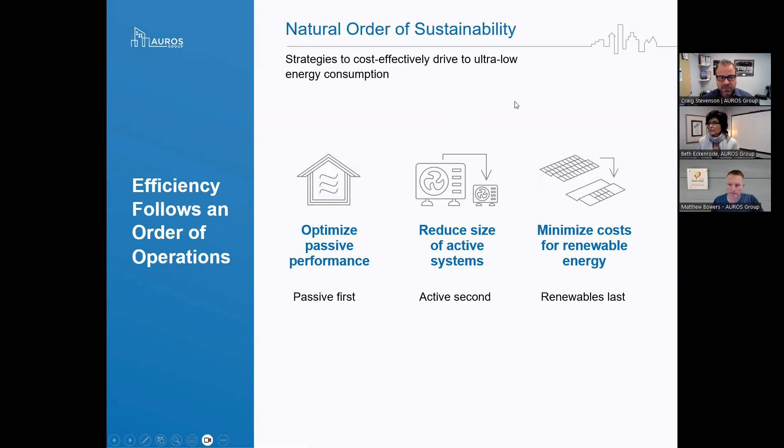The Passive House Accelerator is an organization of practitioners that have been doing this for a long time. And they come at this in a slightly different way, but really using the same philosophies, the same logic, right? They want to also use passive house strategies to first bring out as much efficiency from these buildings as we can. And then they want to electrify everything and then use clean energy to offset that. And that's how they get to zero carbon. It's really the same methodology and the same thought.

We want to electrify everything because we cannot offset fossil fuels like natural gas. We just can't offset them. Once we use them, they're done.

But if we start to electrify our building, we can use the photovoltaic array on our roofs or on our grid to start to offset that consumption of electricity. And that's how we get to zero carbon. It's the same methodology and the same strategies as I outlined in the natural order of sustainability, but it's just shown in a slightly different way.

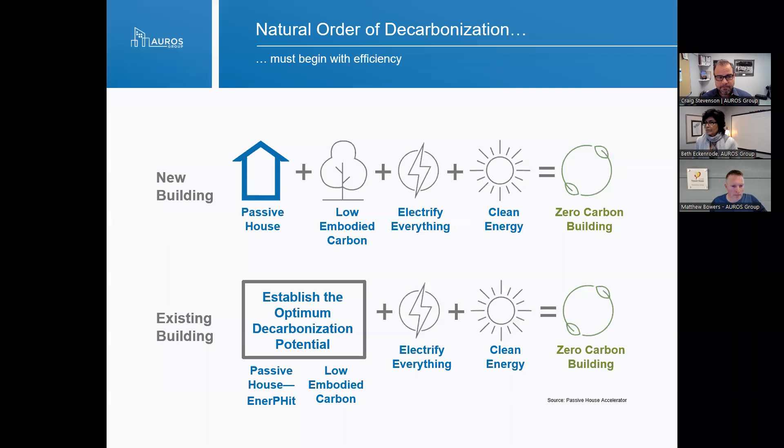So what we're going to get to today is a case study for a project that we're doing in Boston. We got a call from them in Boston, said, hey, I've got this building in Boston. I know I'm facing a fine for BERDO, which is the local law up in Boston for building decarbonization, and I don't know how much I'm going to be getting fined. Can you help me? Sure. Yeah, we can do that.

So we basically sit down with them and we walk them through the existing performance of their buildings and how that is viewed against the context of the regulations. And then the next question we get asked, logically, is how do I mitigate? That's what we're going to walk you through today. We want to show you how we can do this for existing buildings. New's easy. We do new all the time. Just build a better building.

Existing is more difficult because it has constraints. Those constraints are, massing and orientation is already set. Window to wall ratio is already set. Sometimes thermal bridging is already set. So we need to work around those constraints to develop the highest performance building we can get pre-renewables. And that's what we're going to do today with you guys.

Yeah, so thanks, Craig. So let's get started by giving an overarching idea on how buildings are currently being decarbonized. The method that's being used is comparisons. We compare the existing building to other similar buildings, maybe in the same location, maybe not. And we also compare the building with how it performed the year before, or if you're lucky, you can get utility data that's accurate for the past 5 or 6 years.

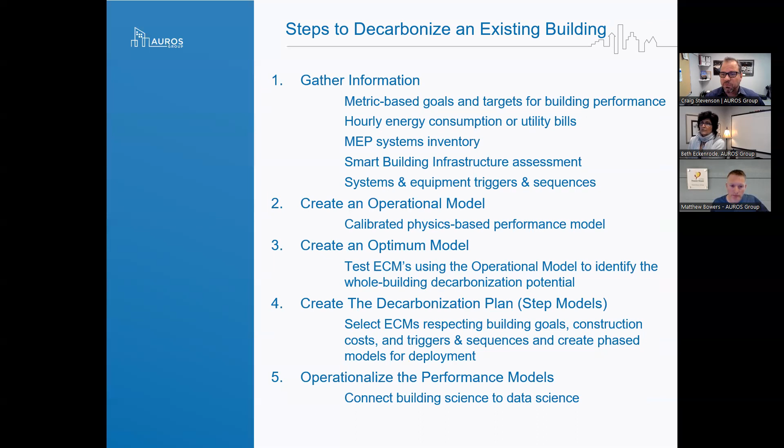So let's dive into our project example, our case study. We've got a 500,000 square foot office building in Boston, and it's going to be facing BERDO, which you're going to have to help me out, Craig. I got it. It's the Building Emissions Reduction and Disclosure Ordinance. Love our acronyms, and we're going to try to define them as we go, but just think of it as their decarbonization legislation. Sure. Thank you. It's a mouthful.

So there are 3 tenant spaces within this office building. One of them is unoccupied, which is great, but kind of wish the whole building was unoccupied. That would be very easy. Now some of the mechanicals are at end of life, so we're going to have some natural triggers for this building that might take our natural order of sustainability out of sequence, and we're going to talk about that. And the reason we were approached to begin with is so that they can avoid fines. The goal is we want to merge some natural triggers, but the overall goal is to avoid any of those BERDO fines.

So Matt, when Beth and I wrote the book, we talk a lot about triggers and sequences. Can you expand upon that a little bit before we dive in, so people don't just hear this word and not comprehend what a trigger is? Yeah, so a trigger is any point throughout a building's life cycle that's going to naturally have to be addressed. Every aspect of a building has some sort of life cycle to it.

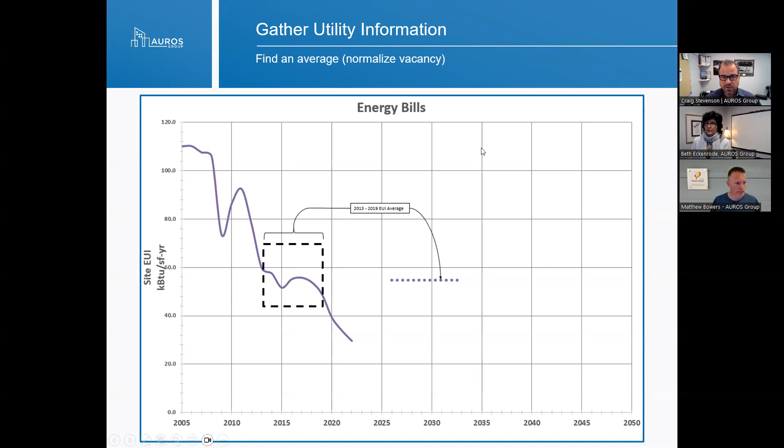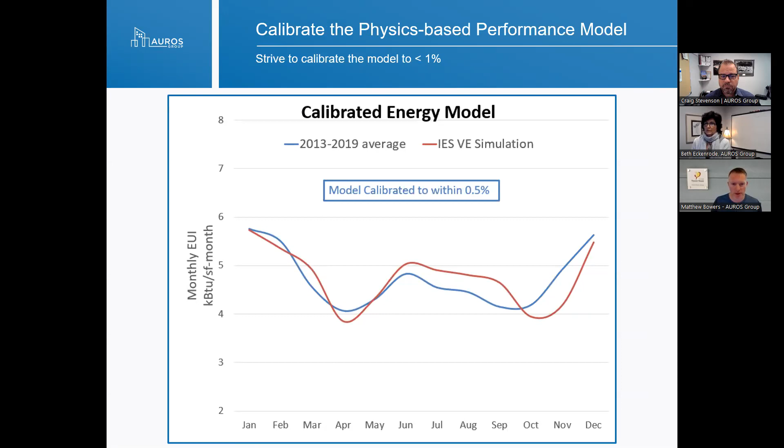Now, once we've established what our calibrated energy model is, we don't know the ratios of where all that energy is going in the building when we just look at monthly invoices. Okay, we don't know how much of that is heating. We don't know how much of that is cooling. We don't know how much of that is plug loads. But when we are able to get a calibrated energy model, we have a much better picture as to the pieces of the pie that are going to be worth going after for reaching our optimum model.

And given that it's an office building, water heating is going to be, I mean, bathroom faucets is roughly all that they're using for water heating. So while there might be an opportunity to replace the water heater with a heat pump water heater, you're just not going to get that large of a return based on the overall energy use of this building.

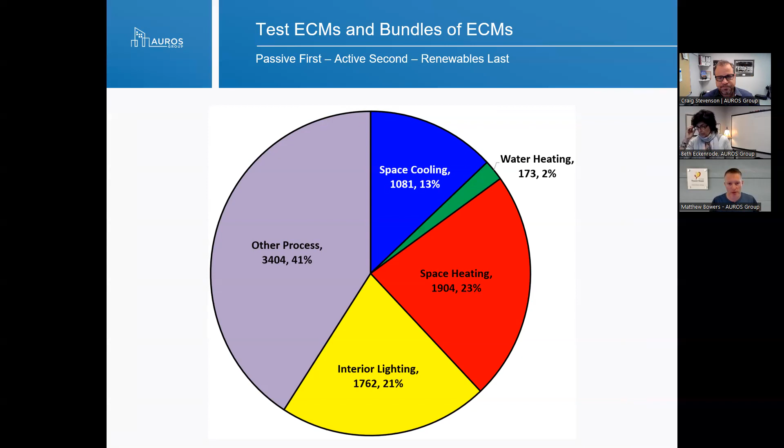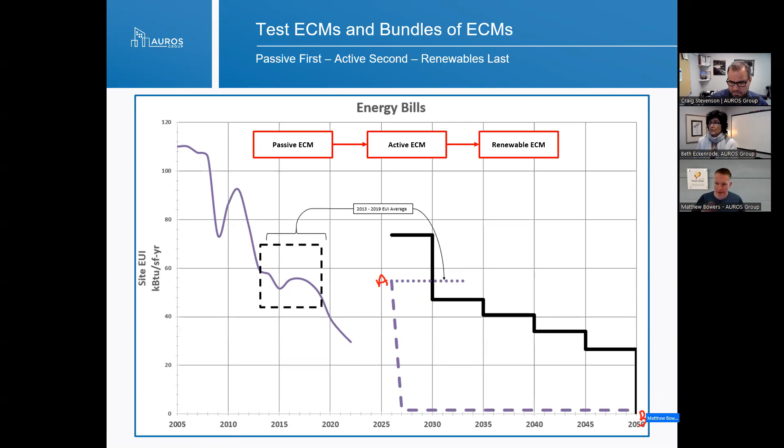Now, Matt, this arc that we see here under that blue line, is that the same arc I'm seeing right here? The path, so if we just leave it there for just a second. So again, we're starting at A, and B is actually down here, right? We want B to be zero at 2050. And so if you go to the next slide, we're taking a different path using triggers and sequences instead of just going like that.

So would it be fair to say that when we develop the operational model, which is calibrated against the building, that is our tool to test? And when we create an optimum model, we're saying, what's everything I could possibly do to build the best building we can build pre-renewables, and then offset as much as I can based on what's available.

So we're executing everything and we're simply phasing it out, as opposed to going in and saying, okay, there are some additional constraints. Maybe our client doesn't have a trigger of replacing, say, windows, and they want to push that along. We can then phase back the solutions and do something shorter than an optimum and still plan that out.

So when you hit that way out in 2050, yep, we're still doing the right thing, right? That's exactly the purpose of a decarb plan. It might be up a little bit higher if for some reason one of those ECMs isn't accepted for whatever reason. Exactly. So the point we're making here is: know where you can go, and then use your triggers and finances to plan that until you get there and you have time to do it.